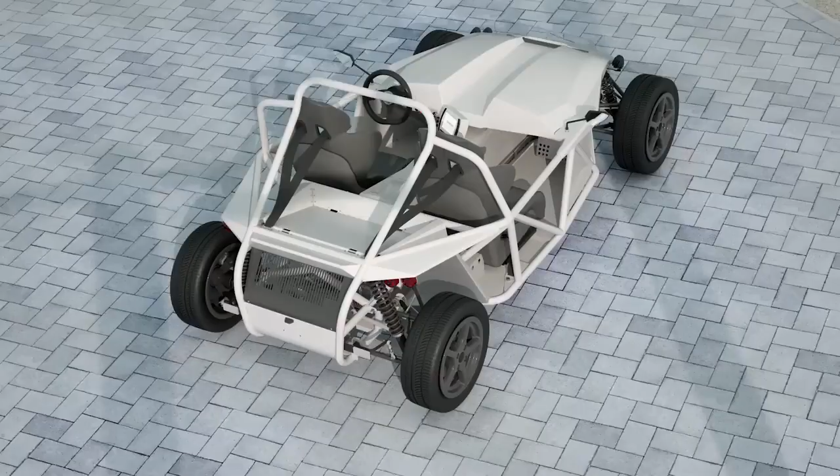Hello and welcome. I'm Ben Widdowson, Marketing Manager at Siemens, and this is the summer 2022 release of Siemens NX. We've got some incredible things to share with you today, so let's get into it.

Today, almost every product being created needs to seamlessly blend electronic and mechanical components. From smartphones to smart buildings, ships to heavy equipment, and medical devices to electric vehicles. Every industry is experiencing this explosion of electromechanical complexity, and this creates a huge challenge for the companies and teams bringing these products to market.

Here at Siemens, we understand this challenge. We also recognize the huge importance of tight integration across the fields of electronic design, mechanical design, and manufacture. And today, with Xcelerator, this integration goes deeper than ever. Bringing these disciplines together on a single platform enables you to build the most comprehensive digital twin, maintain a digital thread throughout the entire life cycle, and collaborate across your supply chain.

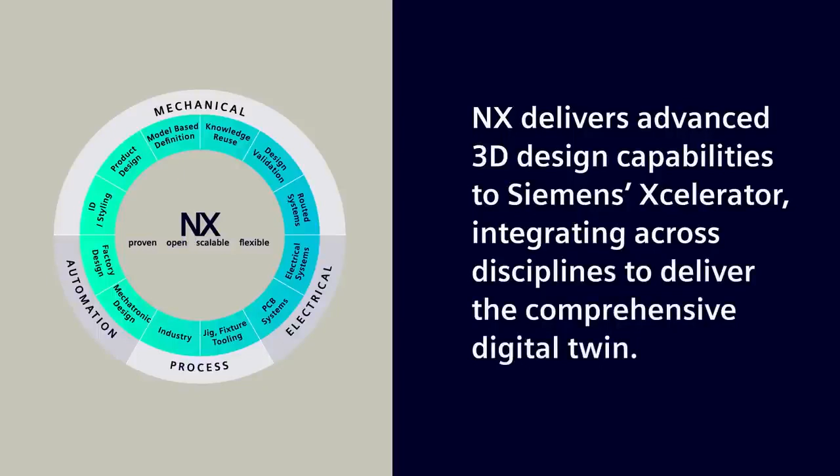NX is the industry-leading electromechanical design solution, offering you the most comprehensive design workflows in the most productive modeling environment. Such deep integration and focus on collaboration make this the best release of NX ever. Earlier this year, industry market analyst Lifecycle Insights commented that Siemens NX provides best-in-class electromechanical design tools, smoothly weaving together the different needs of each discipline, all in a tightly integrated, collaborative environment.

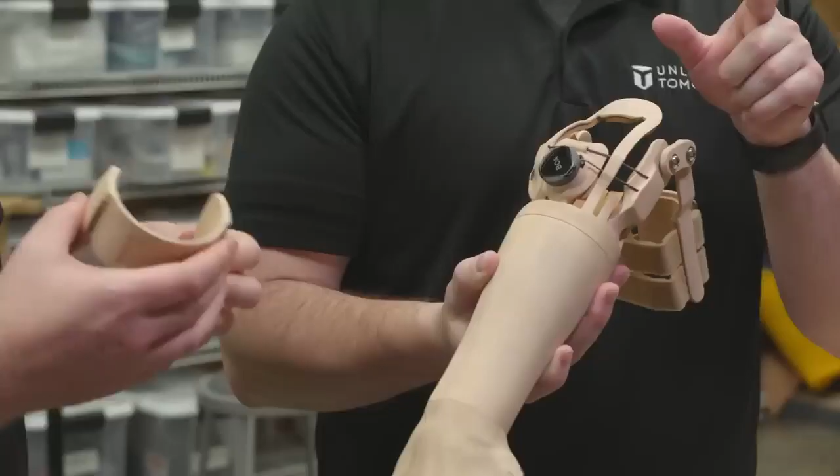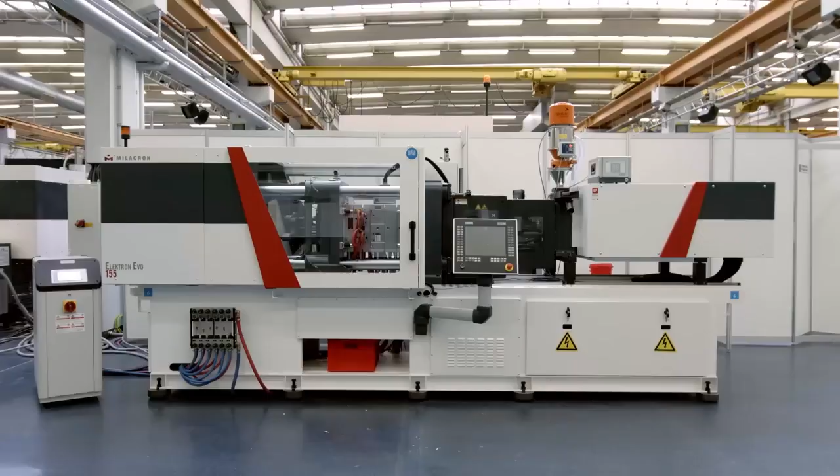Our customers across all industries love using NX, like Unlimited Tomorrow, who are on a mission to make custom prosthetic limbs cheaper and easier to access for the millions of amputees worldwide. And iMFLUX, who are under enormous pressure to create mold designs as fast as possible, whilst also making them right first time. And finally, NASA, who seamlessly integrated design, analysis, and simulation, enabling them to meet the thermal challenges posed by the Mars Curiosity rover.

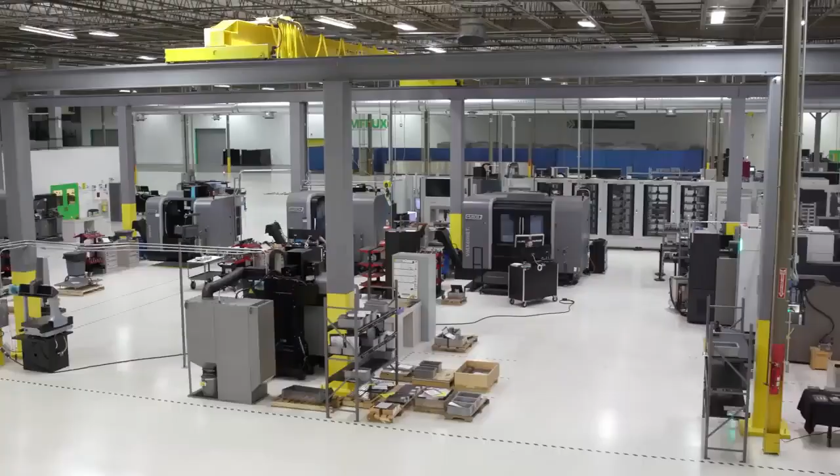Our customers tell us that productivity is a key driver. Electromechanical design teams are under pressure to boost productivity by their executives, whilst also keeping pace with the design and production of increasingly complex, smart and connected products. A staggering 94% of executives are seeking some or a good amount of productivity improvement from their engineering teams.

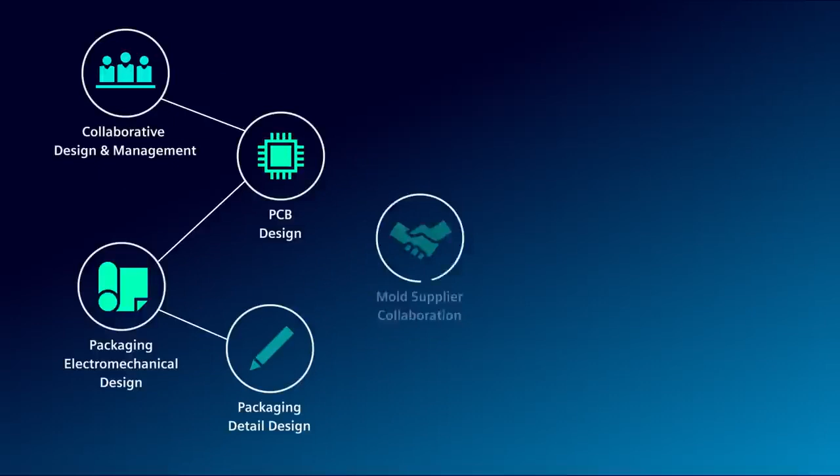Our customers also tell us that security of their data, people and IP is a top priority, and at Siemens we take security very seriously. Being on the latest release of NX ensures that you're benefiting from the latest security enhancements. NX helps you collaborate more easily, increase productivity, and embrace electromechanical complexity, all in a secure environment. Today, we're going to share an end-to-end workflow covering electromechanical design, mold design and analysis through to manufacture. Let's head into the office and jump into the demo.

So, as we head through to join the design team, the design manager has tasked the team with increasing the processing power of the onboard infotainment system. The electronics team will be working to add additional chips and a new heat sink to handle the increased processing power, and the mechanical team will have to redesign the housing to encompass those new electronics. So, let's hand over to Dave for the first part of the demo.

So we're looking at the Active Workspace environment embedded in the NX session, and I have a new notification in my inbox. I see I have a new change request that I need to act upon. Let's open that up and we see that it's regarding the infotainment upgrade. Looking at a bit more detail tells me the infotainment system needs to be enhanced to provide the latest capability in entertainment, navigation and device connectivity.

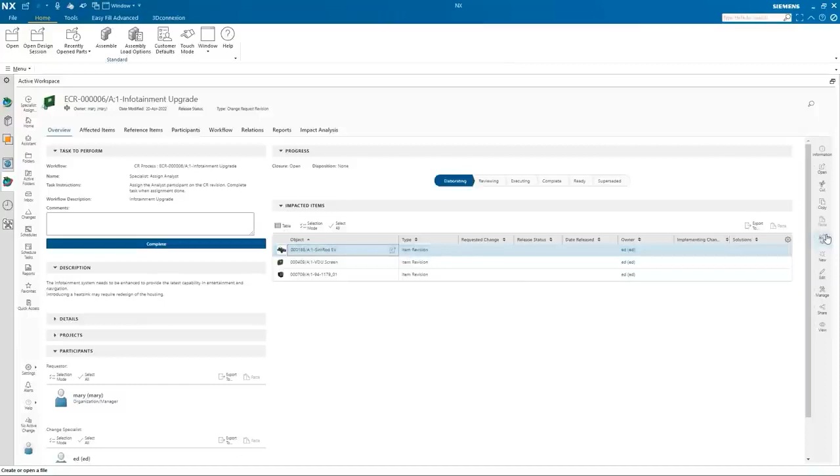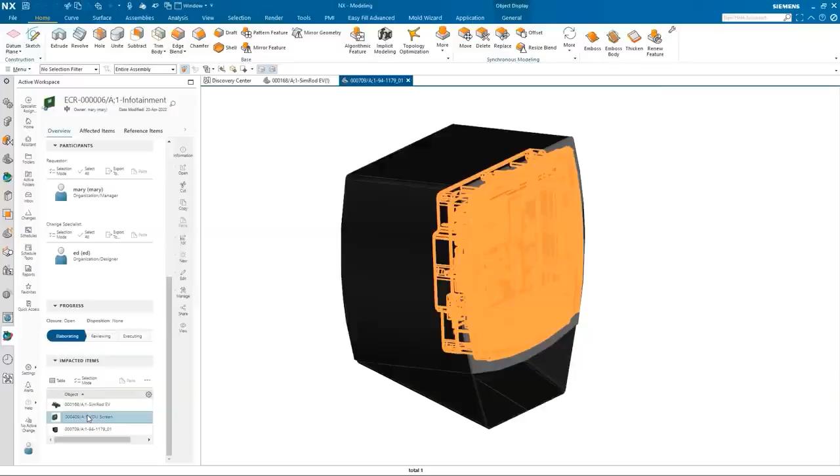Memory traces will need to be improved and increased processing power will be required. And that will require a heatsink to be added, and that in turn may require changes to the housing to accommodate it. The items affected are listed and can be opened directly into NX. As we explore the impacted items, selection in Active Workspace highlights them in NX for easy identification as we get familiar with the change. We'll open the main assembly that shows the current infotainment housing, and finally we'll open the detailed assembly and reveal the PCB that will be modified.

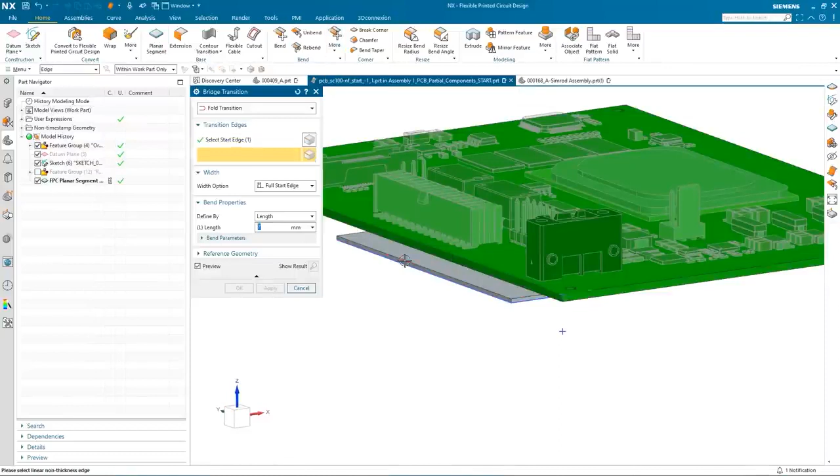Now we have a clear understanding of the parts that will be changed to support this upgrade and can progress with the change request. The first change is to convert the PCB from rigid to rigid flex. We edit the layer scheme to be a rigid flex construction and create the features for the second rigid segment and create the flex segment, both at the appropriate board thickness. Finally, adding stress relief where the flex enters the rigid segment, then developing the board to the flat state.

Once the board changes are complete, we move the connector to its new position and are ready to publish the changes for the board and the connector to the electronics domain. The published data shows the board geometry and thickness change. Now in Xpedition, the electronics designer receives the change and reads in the collaboration data of the board and the connector modifications. Both domains are now synchronized.

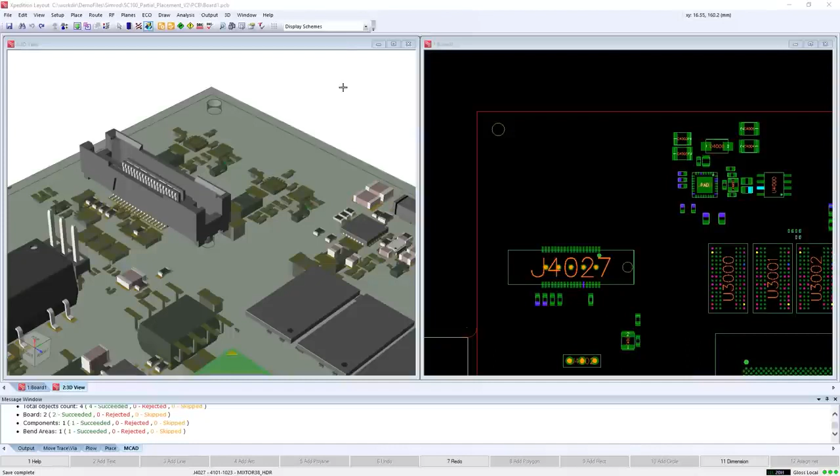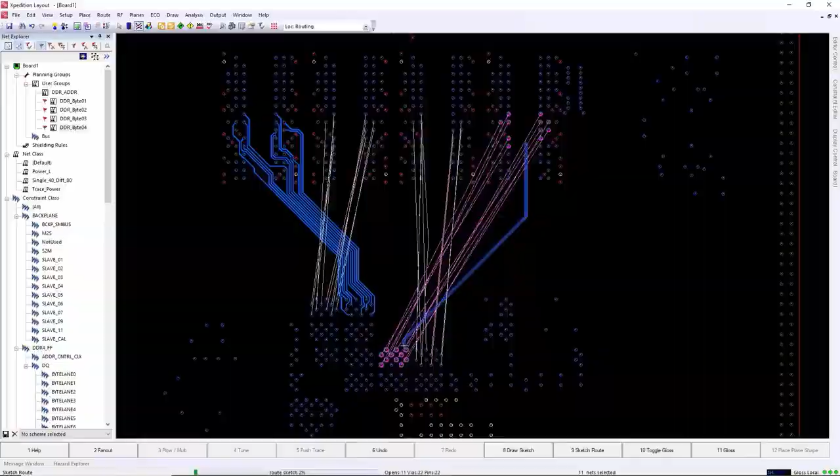The new functionality is now added to the board and the change is prepared for sharing with the mechanical team as a proposal of change. During the time I review the new component placement in NX, trace routing can be continued in different partitions of the design. As requested in the change note, the DDR memory chips are rerouted. They allow very high transfer rates, which requires extremely accurate timing between the different electrical and clock signals. So here they define a sketch path to automatically route a group of net lines to follow the same pattern while meeting the signal integrity constraints.

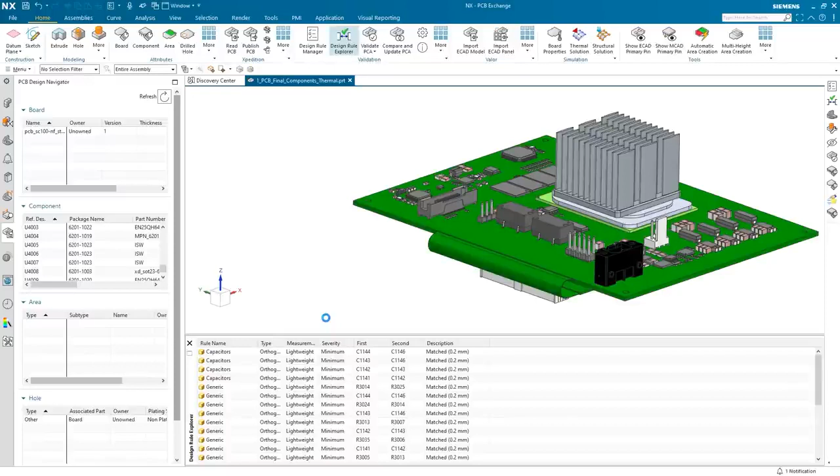The design change has now been reviewed and the final board has been completed by adding the heatsink and the flex, folded, ready for integrating the design into the overall assembly. The final design is then validated using a common rule set shared between both tools, giving the confidence that the mechanical and the electronic domains are in sync and saved to Teamcenter. The design is valid, and in the next step, we'll head over to the mechanical design team.

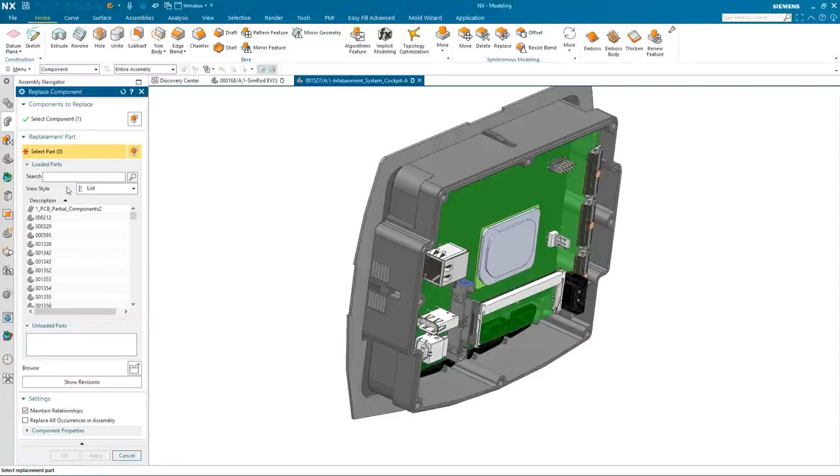So Dave's given me the updated PCB for the infotainment system. So we're going to take a look at it and see if there are any issues. I've got the assembly opened in NX, and I'm just going to isolate the infotainment system. Just going to remove some of the outer casing and we'll remove the back cover. And you can see the original board in the back of the infotainment system. So I'm going to replace that with Dave's new PCB. You can see that. And we'll include it now in the assembly. And then we can take a look and see if there's any issues.

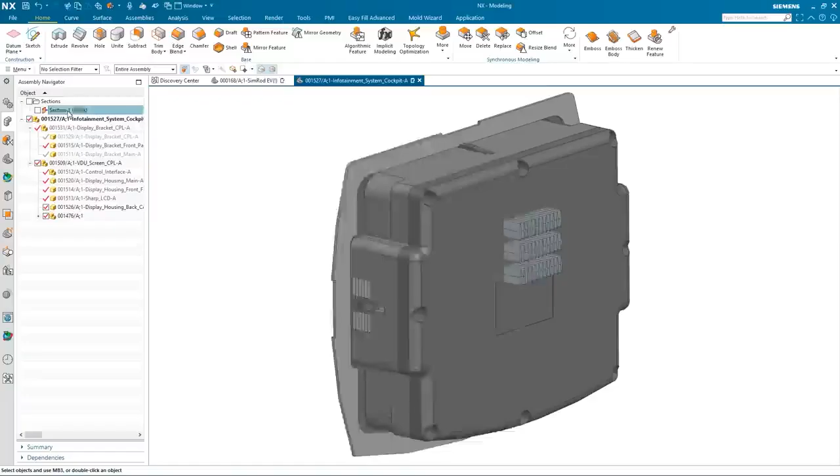So you can see there's the new assembly. It's got the heatsink in it. And when I bring back the back cover, you can see it's actually protruding. If we take a slightly better look at that by clipping it, you can see through the section of the model where the issue is. So I'm going to need to make a modification to the back cover. And it'll also give me the ability to add a little bit more of an organic shape to this, a little bit more aesthetically pleasing. So let's take a look how we do that.

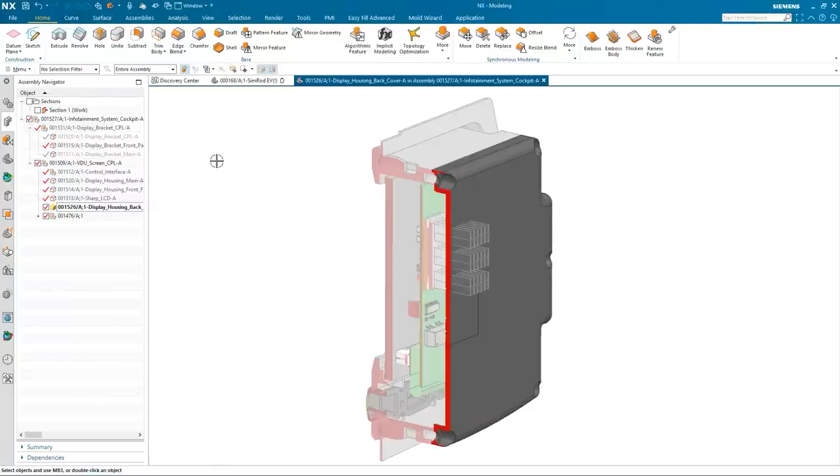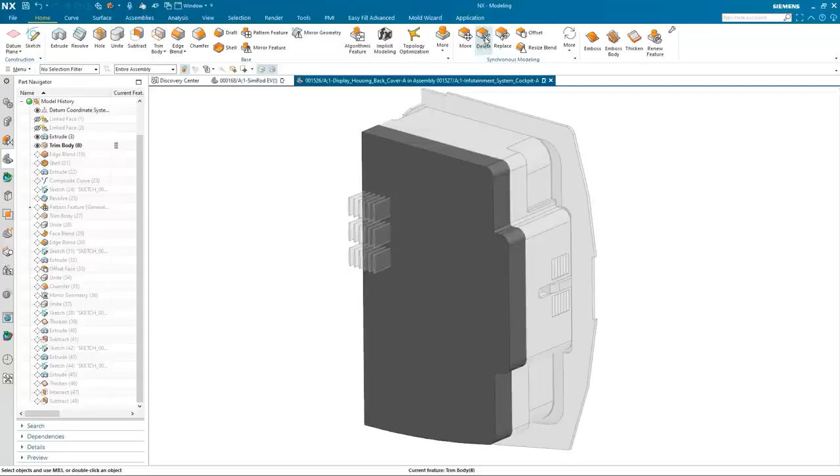We'll make the back cover our working part, and you can see we've got a fully featured model. And I'm going to roll back the feature tree to a position where I can make my changes and then roll the model forward to incorporate those changes. So I'll roll it back and we can start to construct a shape which is going to alleviate the issue that we've got with the heatsink protruding. So I'm just going to use some synchronous modeling first of all to remove some of the blends. As you can see here, very easy to do that.

And let's just extrude this back face. And I want to obviously go past the heatsink, but what I'm going to do is ask it to be offset from the back of the heatsink by 4 millimeters. So as you can see, I've got some decent clearance now. Once I've got that, let's add a little bit more shape to it.

So we're going to add some draft. So again, we can pick up on add some draft, pick up on that face as the direction, and we need a stationary face, which should be the back face of this part. And then we can select the faces that we want to draft. And we'll add some draft to 2 of the other faces. We'll change the value this time, which will be this one here, that face, that one there, that one there. Okay, so I've got the base shape.

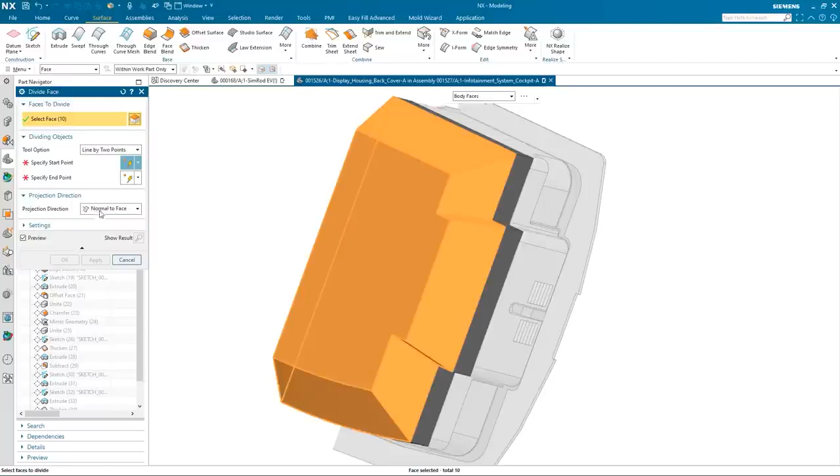So I'm just going to divide this back face here between that point and that point. And again, using synchronous technology, we're just going to move this face down a little bit. That's fine. So let's just unite that face with that new model. Okay, and we're going to add some shape. And to do this, we're going to use X-Form.

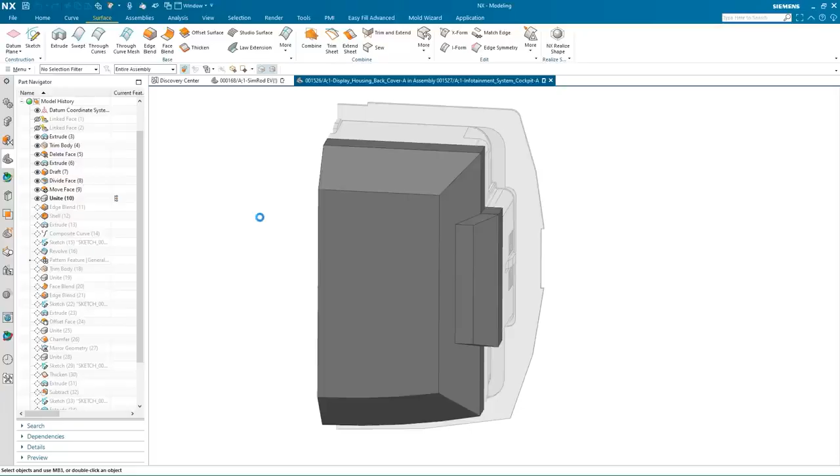X-Form gives me the ability to select a face, give me options to make it easier for me to add some form. So in this case here, I'm just going to drag that face out using the control polygon. We'll apply that there. We can pick up another couple of faces. This one at the top. Again, we can add some form to that. And I can continue to do that with some of the other faces on the model to get the shape I need.

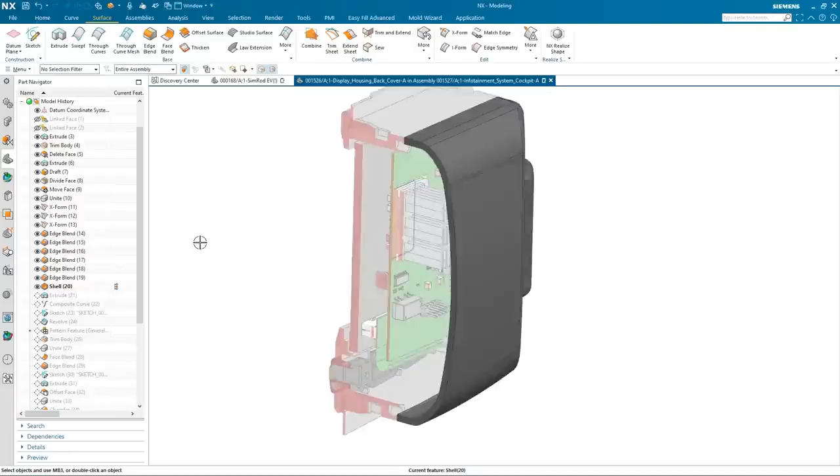So as you can see, we've added a few more features to our model, a few more blends. I've just got one more blend to add, and it's going to be on this set of edges here. So again, we'll just drag it to size, and we'll okay that. So there we have the one half of our model, and you can see now that we've removed the collision between the heatsink and the back cover. We've given it a little bit more form, make it more aesthetically pleasing.

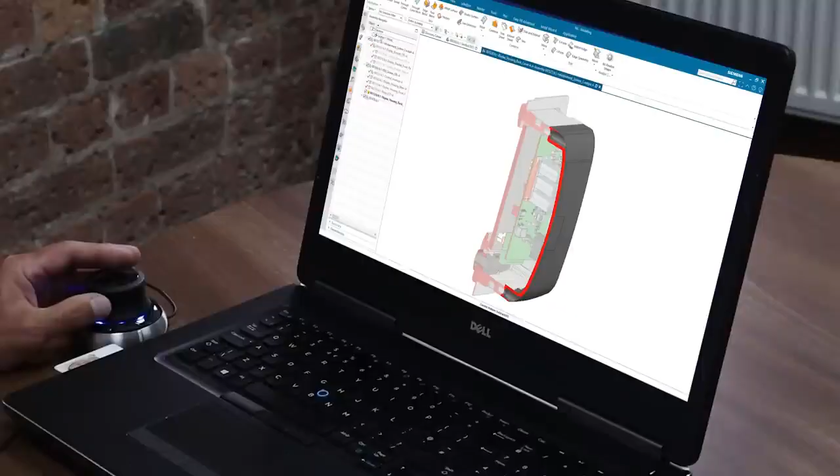All I need to do now is to roll the model forward to the end of the feature tree, and all of the features will replay, taking into consideration the additional features I added to the model. And there you can see it's completed. What we can do now is unclip, and there is our completed modified back cover. I'm going to head over to see Sam to see how we can collaborate on the detail design.

I finished that design modification on the rear cover, and I thought we'd take a look at it and see what else needs to be done. Excellent. So let's get started working on this so we can get this project done.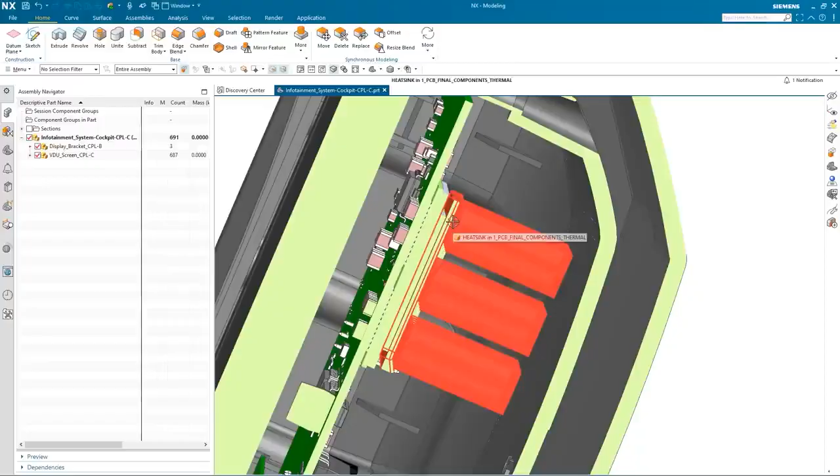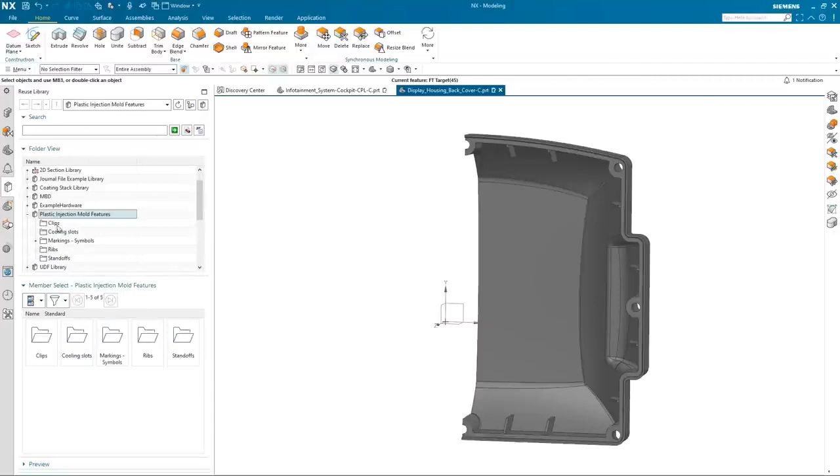As we collaborate and review the electromechanical design of the infotainment system, we have been notified that the PCB design has been upgraded to accommodate a larger heatsink. This design change will require us to make additional venting slots to the back cover to meet this heat transfer requirement. As we had a chance to review this design's history of the back cover of the display housing, we see that if we insert the venting slot at the earlier part of the design intelligence, we can minimize the workload and maximize the efficiency.

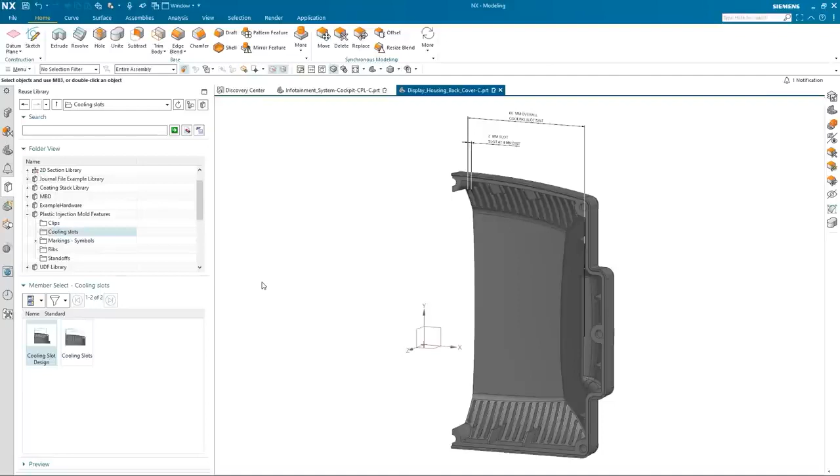We'll now insert a couple of these feature templates for the venting slots to our rear housing cover. These templates require some input parameters, then it will automatically embed intelligent venting slots along with the proper PMI entities onto the cover. Reuse features and feature templates are all part of NX standard functionalities that can provide companies' IP into their design process. Many of these plastic injection features are a part of the standard design.

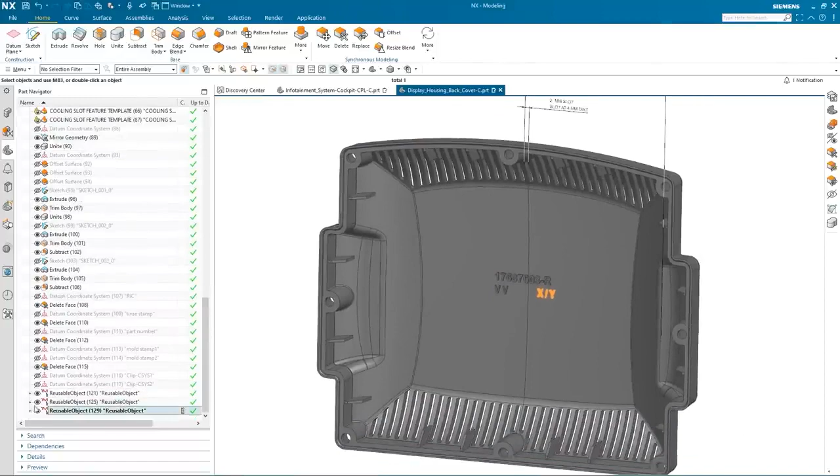We have enabled and reused these intelligent features that can quickly complete the task at hand and then focus on other time-sensitive items. Once these feature templates are added to the housing cover, users can see how NX is maintaining that intelligent design within its history. From the feature history, I have already created several standard plastic injection mold features. I will quickly show you how they can be quickly added to the current design.

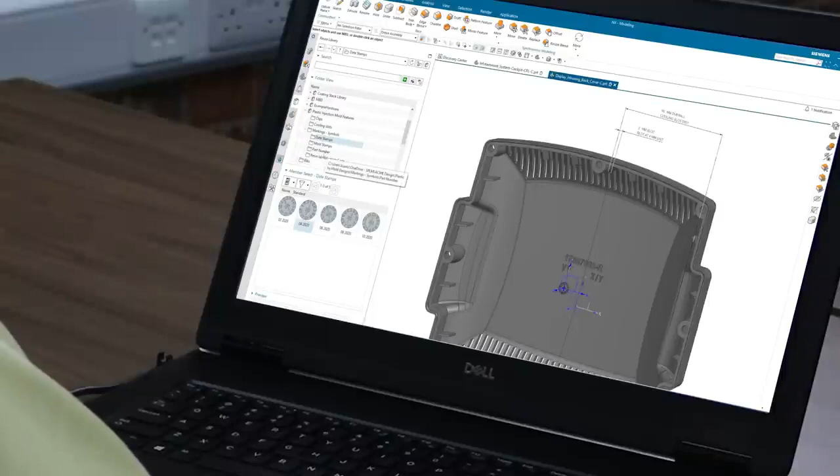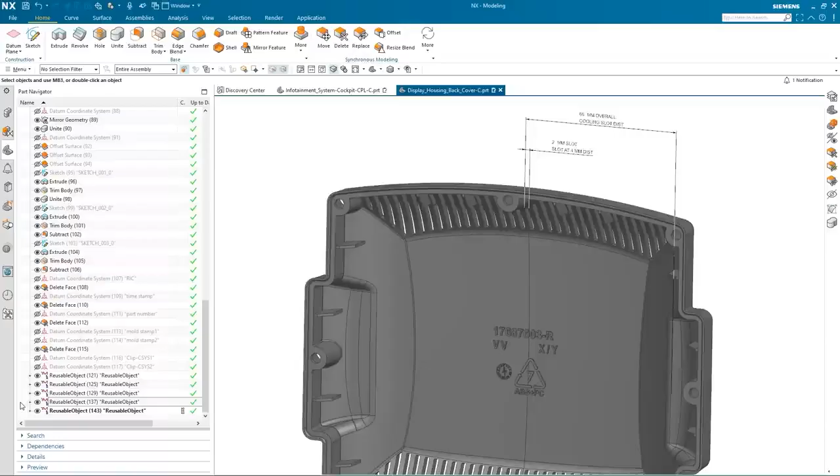Adding timestamp and RIC is as simple as drag and drop these intelligent features from the reuse library onto the target placement CSys. As you can see, the usage of the reuse library, in comparison to the designer that had to create these features manually, demonstrates the power of NX in a design process. To increase the productivity of the plastic injection manufacturing design, reuse of these standard features will support that requirement. Now we have completed these design tasks. We see that NX is tracking these design intelligent features for any future design change.

We'll now take a quick look at the infotainment system. By removing the rear cover, we see that quickly we were able to add these cooling slots to support design change and collaborate with others in the engineering process by using Siemens NX. I have now completed the design change. We'll hand it back to Paul.

Thanks, Sam. I can see I have a notification showing that changes have been made to the assembly. I can now reintegrate Sam's changes back into the master model. Well, you can see that the new electronics are now housed correctly in the enclosure. So we're ready to hand over to Matt, who's going to run a thermal validation before we get the part manufactured.

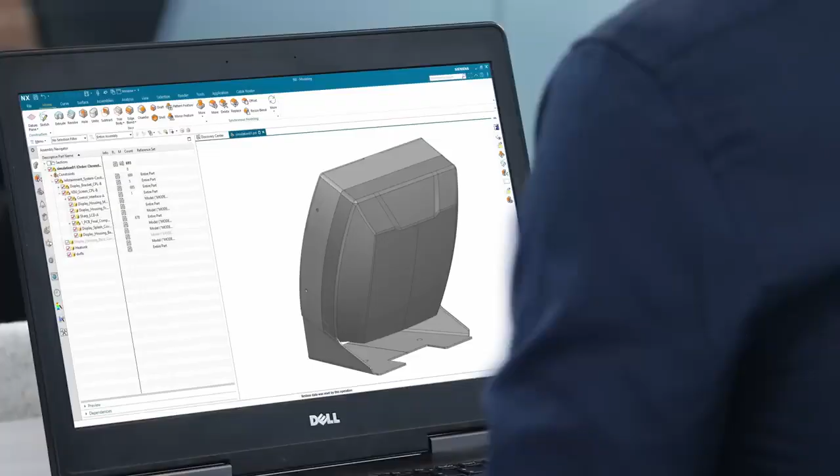Thanks, Paul. We're going to use Simcenter FloEFD for NX to perform 2 thermal simulations to see how the 2 rear cover designs, with and without cooling holes, impact the temperature of the electronics inside. We're now in FloEFD. Using a template, we've created a project to simulate the back cover without holes first. All the correct material properties have already been assigned. The materials specified in the NX model can be used, or new ones specified as desired.

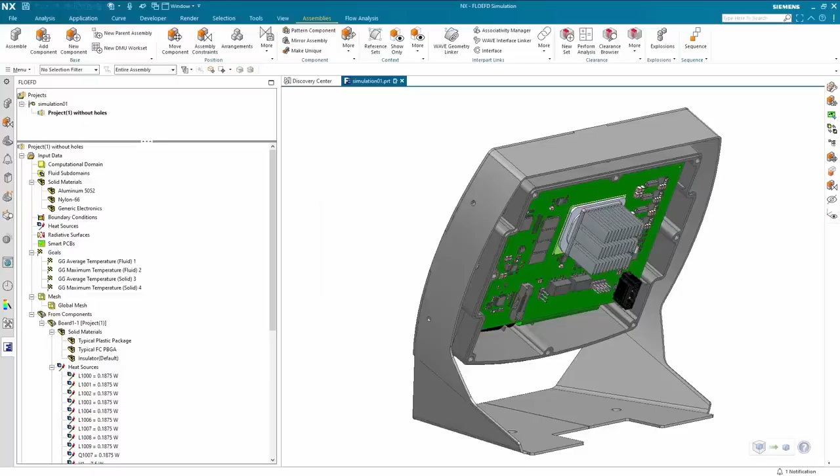The mechanical representation of the PCB and components is replaced with a thermal representation that includes all the necessary material and thermal attributes for fast and accurate simulation. In this example, FloEFD's Smart PCB technology is used to enable the detailed copper distribution in the PCB to be modelled without significant computational overhead. A detailed component model of the microprocessor is also used. This level of detail in the PCB and component models is key to obtaining accurate predictions of component temperatures.

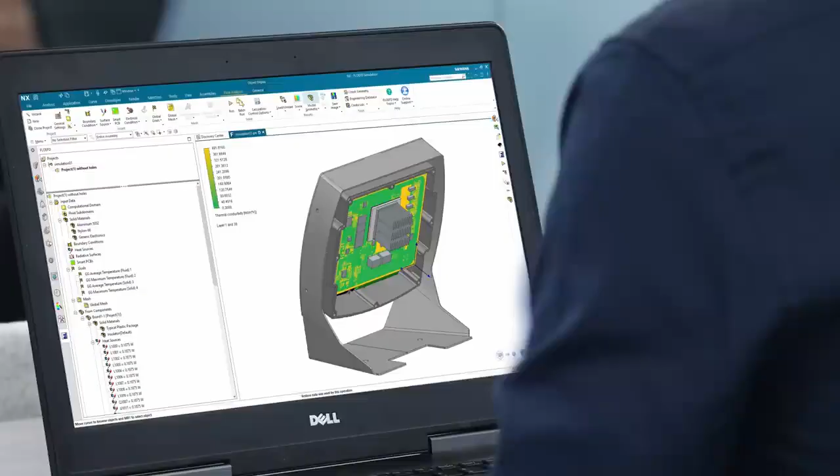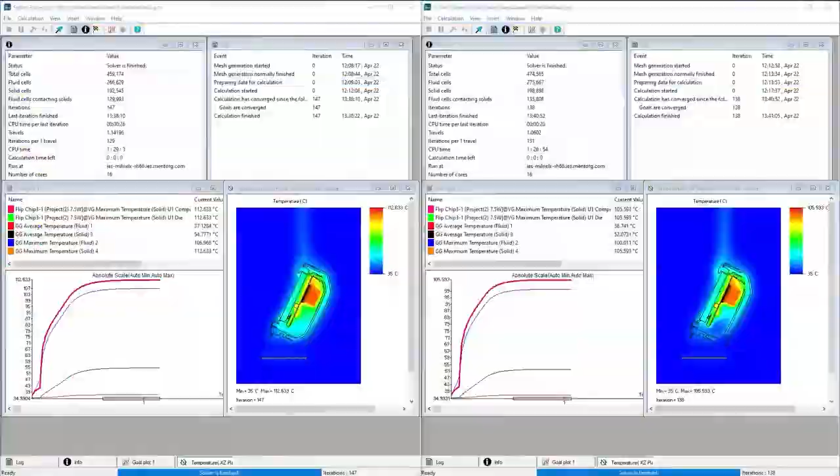Before we run the first simulation, let's clone the project to create a second simulation featuring the modified cover with additional cooling holes. Now we can solve both projects. Both simulations have finished and we're ready to review the results. Straight away, we can see just from the summary results shown in the 2 solver windows that the addition of cooling holes to the rear cover has had a significant impact on the junction temperature of the microprocessor.

Inspecting the detailed results of the second simulation with cooling holes, we can again see the junction temperature of the microprocessor is about 105 degrees C. We could review the results of the first simulation without cooling holes in exactly the same way, or use FloEFD's built-in compare tool to compare both result sets side by side. From this, we can see that the addition of cooling holes has reduced the junction temperature of the microprocessor by about 7 degrees C. A temperature reduction such as this could prove significant in ensuring the long-term reliability of the product.

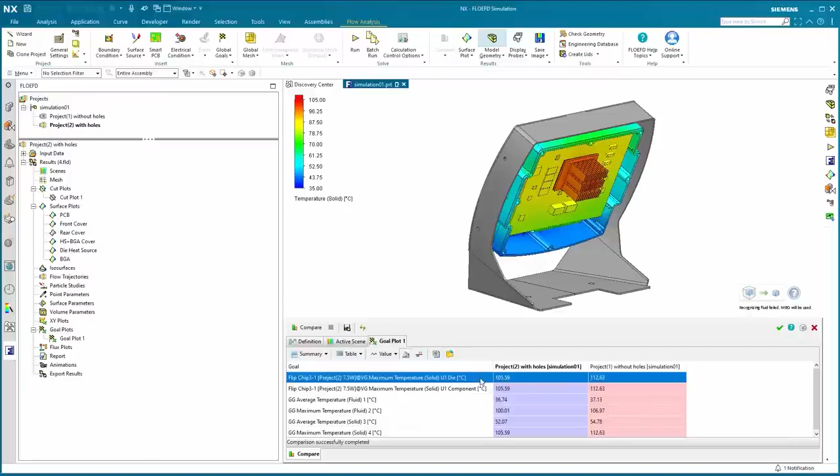Now the thermal simulations have been completed, I'm going to hand over to Boris, who will collaborate with our supplier on manufacturing. Thanks, Matt. Now that the plastic housing has been revised and completed by the mechanical engineer, I can use NX Mold Connect. NX Mold Connect is a new Siemens cloud-native SaaS solution that connects OEMs with their trusted suppliers to efficiently manage collaboration. It's used to ensure that parts are fit for manufacture, to speed up the design cycle by eliminating rework and extra cost. With instant-on access, there is no deployment or configuration necessary, so getting started is quick and easy.

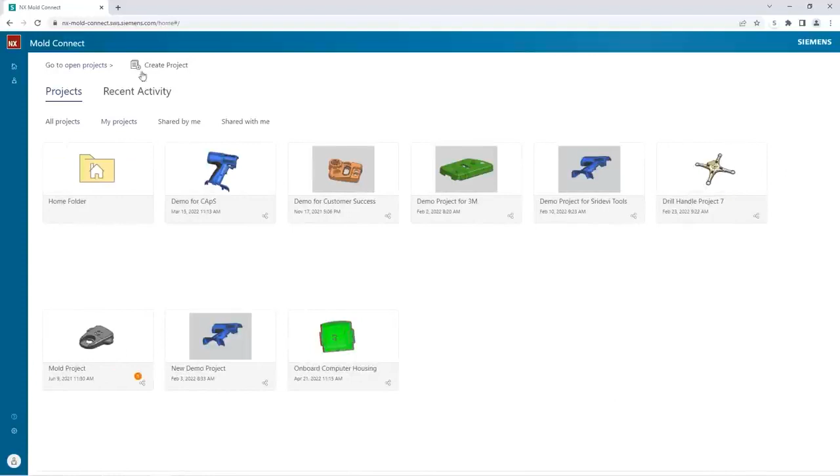After logging into NX Mold Connect using my internet browser, I can start by creating a project for the infotainment system and set the project number and due date. Then I can upload the display housing plastic part along with the part spec. After the upload is completed, I can create a quote request. I'll see that the status displays that this is a new request, which I can add files to. After the request is created, I can add files to it from the project.

Next, I add my trusted suppliers to the list of suppliers in the RFQ. I can choose from several file access permission levels and send the request. I can see that the status of the quotation is updated to out for quote, and it also shows that the quote has been sent to both suppliers. At this point, I'll wait to hear back from the suppliers.

Thanks, Boris. So I've just received an email letting me know that I have a request for quotation from my customer. Let's check it out in NX Mold Connect. Using Mold Connect makes it easier for me to collaborate with my customers on mold quotations. I'll start by creating a quotation based on the part and spec provided by the customer. The status has now changed to acknowledged, so they'll know that the RFQ is in review.

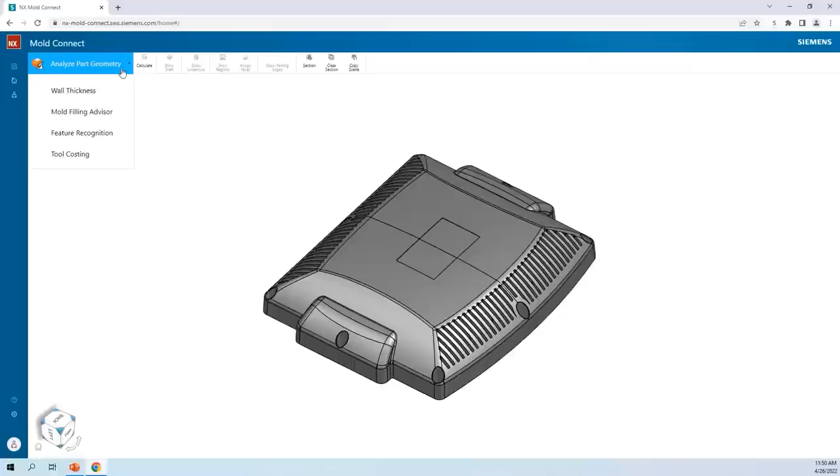The first thing I'll do is open the part to run design for manufacturing analysis. I can see that I have a choice to perform a few different types of analysis: geometry, wall thickness, and mold fill. In this case, I'll start by selecting the body, the draw direction, and setting the draft angle limit. Once the calculation is completed, I can see several different types of results.

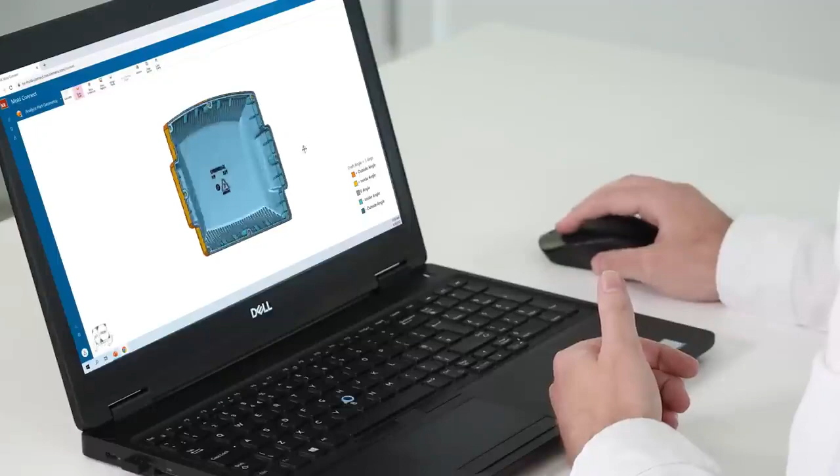The draft analysis shows the regions with different ranges of draft angles. I can show and hide the regions to inspect the model and find problem areas. After hiding the drafted regions, I can see that the sides of some of the holes have not been drafted, so I'll capture the feedback and send it back to the customer. From the analysis, I can see that the model doesn't contain any undercuts that require additional sliders, keeping the cost of the tool down. Cavity and core regions are well defined, so I'm going to send the report to the customer showing that the parting line, wall thickness, and mold fill results are acceptable for manufacturing.

We're back, and the customer has now corrected the draft issues, so I'm now ready to generate a cost estimate by using results from automatic feature recognition. This makes creating a quote quick and easy, and I can share it directly with the customer in NX Mold Connect. So let's go ahead and send it.

We've received the accepted quote back from the customer, and we've been awarded the job. So let's go ahead and jump into NX to design the mold base. To design the mold base, we're going to use NX Mold Wizard. NX Mold Wizard embeds tooling expertise into NX, enabling you to create molds based on the product model with full associativity between the two. NX Mold Wizard helps you decide the mold direction automatically based on the part geometry.

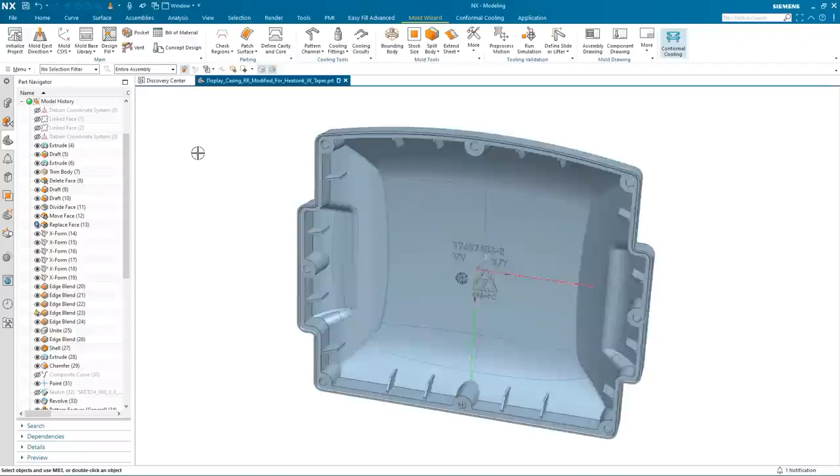We're going to use an existing preconfigured project, then select the materials of the part to initialize the mold design activities. As you can see, workpiece has been added automatically. This layout will be multi-cavity. In this case, we'll choose the rectangular option, followed by the number of cavities and the distance between them.

Embedded mold filling simulation inside NX can simulate the entire filling process of injection molding. It's an important step to understand where problems may occur in the cavity filling phase, so we can further optimize the design. We're going to take the cavity layout previously created and analyze it. Using the layout, we can define the process conditions for validation, and NX Easy Fill Analysis provides 6,000 plus commercial materials out of the box. We'll select the material, producer, and grade for the part.

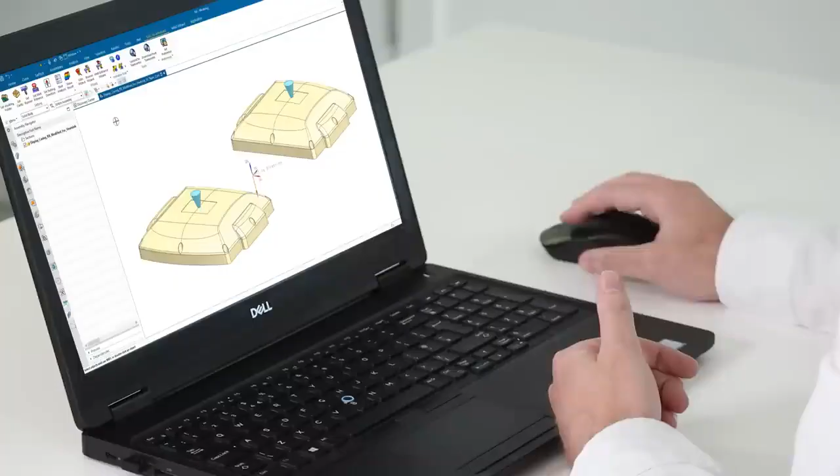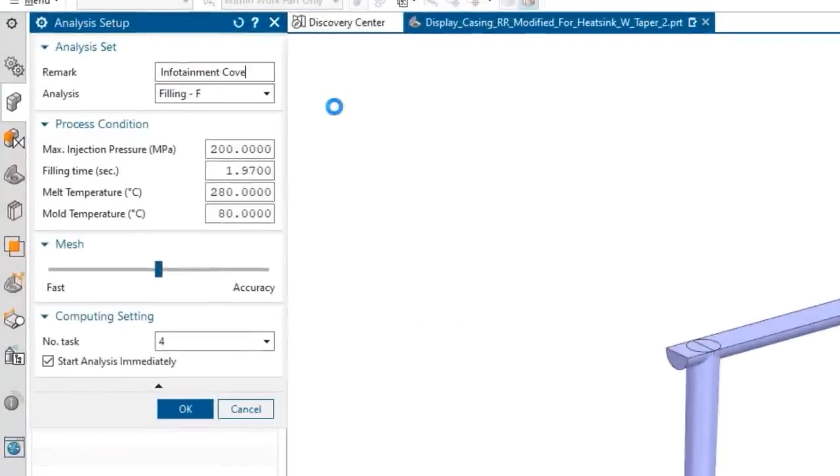Next, we'll define realistic runner and gates for the mold design and define the mold direction. We can then go ahead and set up the processing conditions. NX provides capabilities to simulate the filling and packing or entire filling, including packing, cooling, and warpage. For this mold, we'll go with a full analysis. Next, we want to set the process condition such as injection pressure and filling time, and then let it run for solving. Once it is solved, we can visualize the results.

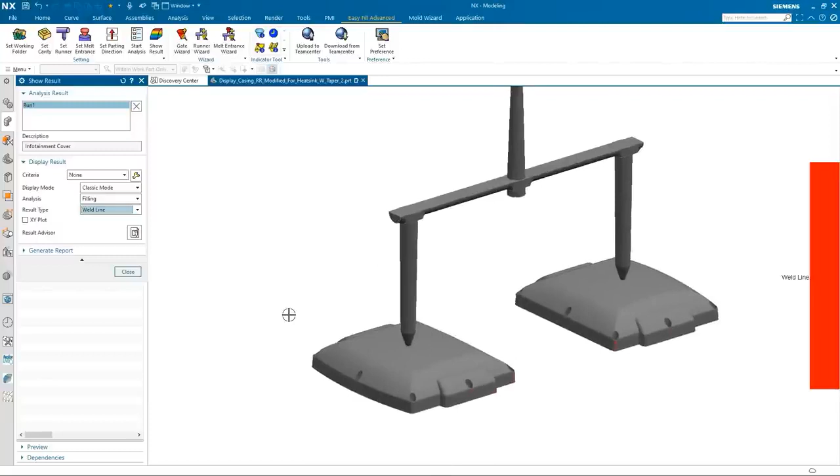We'll start with melt front time to see how long it takes to fill the cavity, then move on to weld lines, air trap, gate distribution, pressure, and finally, we'll take a look at warpage and packing. Once we understand what's going on with the injection process, we can automatically prepare a report to provide feedback to either designers or customers to see if there are any adjustments that need to be made either on the part, mold design, or injection process.

In this next stage, we'll identify the core and cavity regions, creating parting surfaces and extract the core cavity. With the use of the check regions function, we're able to easily identify core and cavity regions and assign colors to these, which will later be used for creating parting lines and extracting regions.

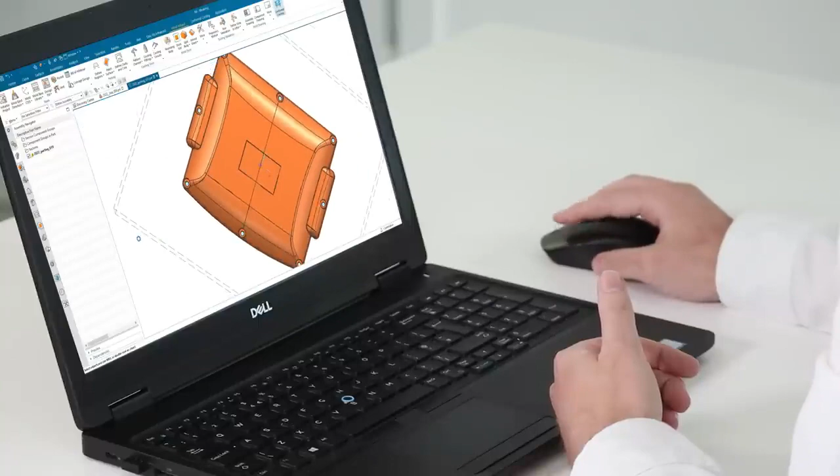NX Mold Wizard has advanced automated tools for creating optimal parting lines based on the draw directions and different regions defined. NX identifies the openings on a design part and automatically creates shut-off surfaces needed prior to extracting the core and cavity. NX Mold Wizard guides you through the creation of parting surfaces with recommended surface types based on the geometry conditions. With the parting surfaces defined, a single click is all that's needed to automatically execute the core cavity extractions.

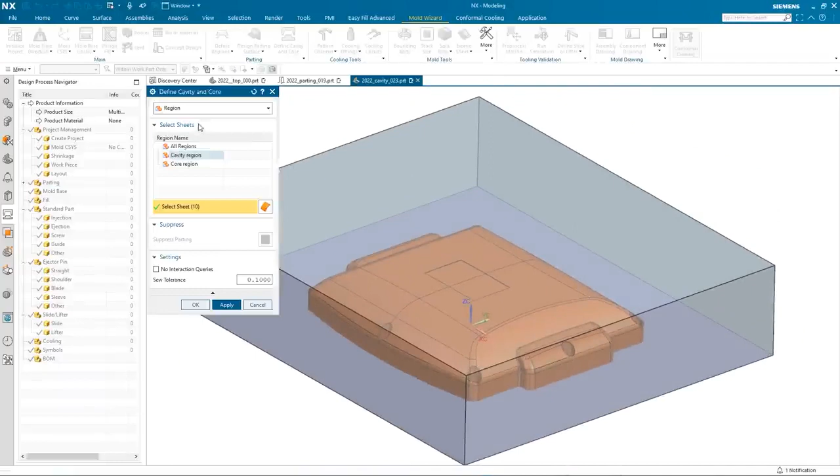Finally, these files are added to the top level project. This shows the power of NX Mold Wizard, improving your productivity by automatically managing the appropriate project structure. Now we're in the position to create the 3D mold base using a library built on industry standards such as Hasco and DME. NX Mold Wizard provides a large number of standard mold parts out of the box covering many common vendor components. You can also configure your own standard parts.

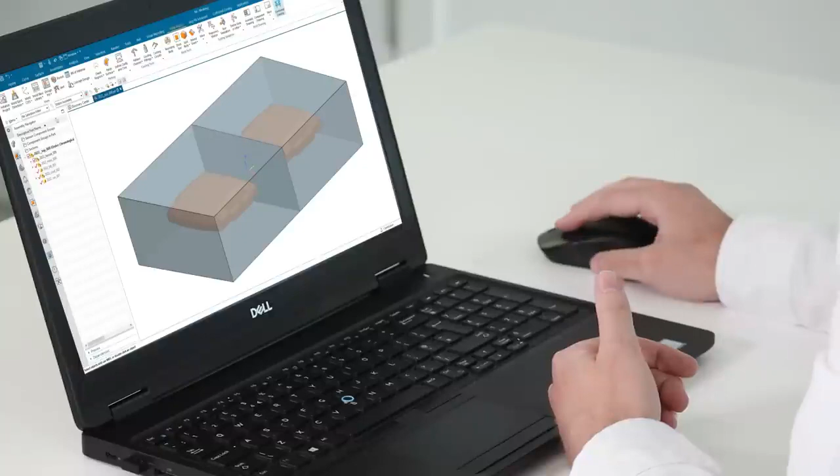Go ahead and choose a mold base from the reuse library. You can select the desired index and adjust the parameters to create the 3D mold assembly. NX provides a visual preview of the mold base too. Once the mold base is created, it's added to the mold structure automatically and you can see the moving and fixed half in the assembly navigator.

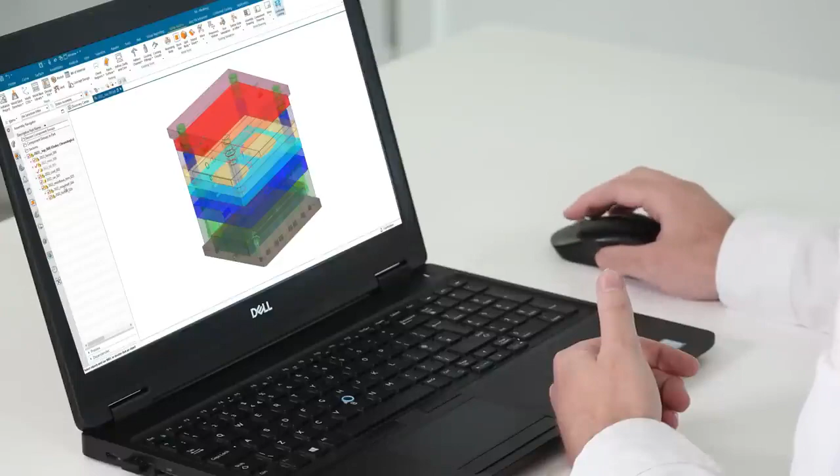Improving the cycle time and quality is important, so we're going to add conformal cooling channels to both the core and cavity inserts to achieve this. Mold inserts with conformal cooling channels can be easily created using additive manufacturing processes, which we will see later on. NX has various ways to create a conformal cooling channel, but in this instance, we'll use the projection method. There is a sketch profile that will be projected onto the product surfaces in the mold cavity.

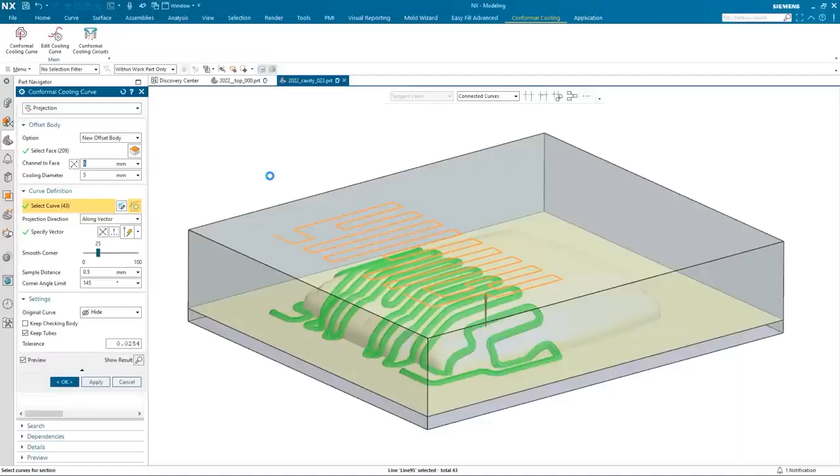The first task is to define the minimum distance that needs to be maintained between the product surfaces and cooling channel center. We can then choose the cooling diameter to achieve the proper flow of cooling water, and finally select the sketch mentioned earlier. And there you can see the cooling channels with the desired conditions have been created. All that's needed now is to complete the design by creating inlet and outlet of the cooling channels, then the injection systems based on the mold filling simulation we performed earlier.

Now that the mold design is complete, I'm going to hand over to Joe on our manufacturing team, who'll be 3D printing and finishing the mold. So we received the design part now from Jamie and we're ready to take it into the NX additive manufacturing environment to prepare it for printing on the Renishaw printer.

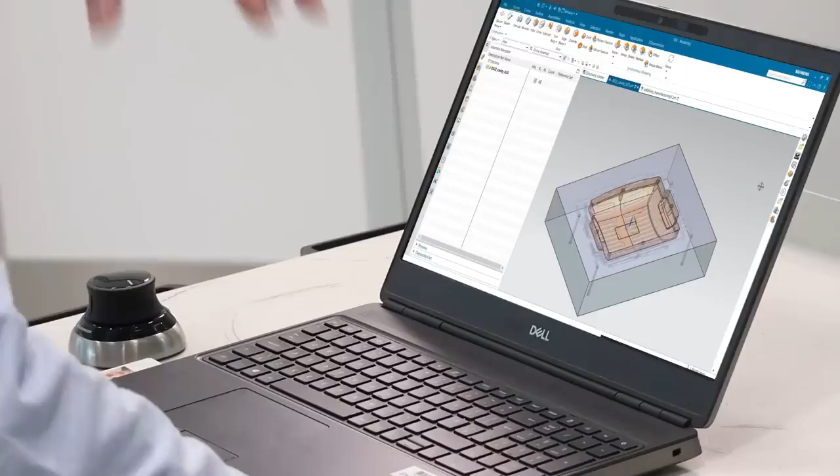So we can see from the geometry that's been designed by Jamie that this is perfectly suited for additive manufacturing. We've got lots of internal cooling channels which wouldn't be able to be produced in any other way than additive manufacturing. So let's take the part into the NX AM environment. So we create a new NX session. The first thing we're going to get asked is what printer do we want it to go onto.

So I've got a representation of the Renishaw print tray already configured in the AM environment. And that gives us an exact representation of what's in the Renishaw printer behind me. We can now move on to positioning the part. So it's really important that the part is positioned in such a way that it reduces the amount of support materials because that's time consuming to remove. Also make sure we have the highest quality component that can be printed.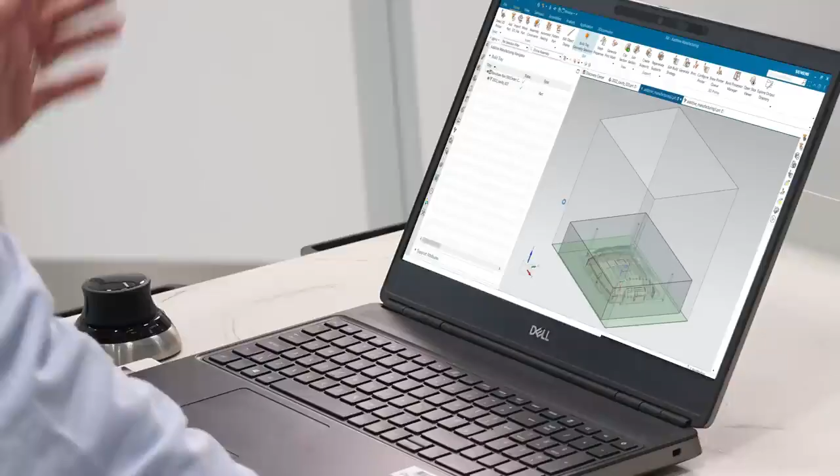So if the part was a little more complex or not as prismatic, we could run some orientation optimization, which will give us that best orientation. But in this case, it's pretty simple. We're just going to flip the part 180 degrees round. And then what we're going to do is move it 5mm off the printer bed so that it can be removed easily. So the next stage will be to apply some support materials.

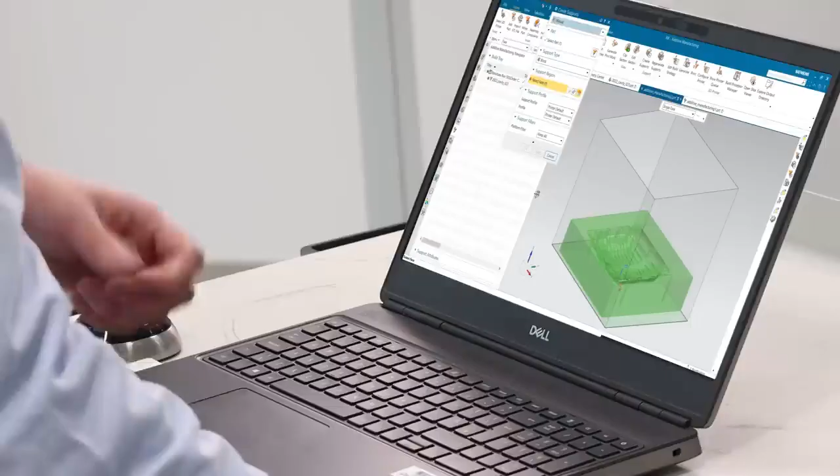There's two ways we can do this. We can either use the automatic support creation, where NX will look at all the geometry and analyze any areas that will require supports and it will apply them. The second way to create supports is to simply select the part and then select the faces you want to create supports on. So I'm going to select the part, select the lower face.

You'll notice there was an area called support profiles. Support profiles is where we can store and retain different types of supports, different parameters for those supports that can be used or specifically dialed in for particular materials, for particular printers and for particular geometries. And that really makes it easy for a business to standardize on what support profiles work best for their components. As we can see here, we've got the generated block supports and everything looks really nice.

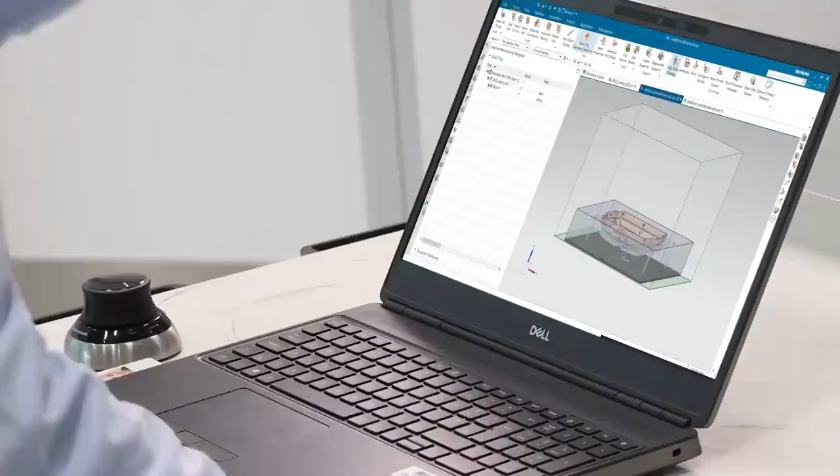And the next step we need to do is prepare that particular part for the printer. And to do that, we need to assign a build strategy. So in the build strategy, we've got some parameters such as the layer thickness, and the laser patterns that are going to be required. And again, that can be material specific or it can be printer specific. But regardless, we can set them directly in NX and we can simply hit the generate button and start the slicing. What happens then is NX will break that geometry down into all those slices so that there is an output file ready to go directly into the Renishaw printer behind us.

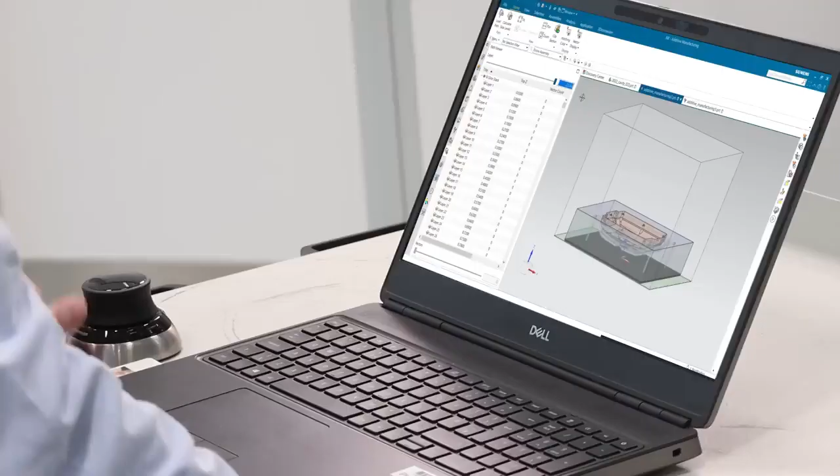Just before we do send that part out, we can take a quick preview of what that looks like in the path viewer. And by dragging this handle across, you can see all those different layers that have been sliced, all those internal cooling channels, how it's going to be printed out, all the way down to the support materials at the bottom. Okay, and that's about it. We're ready to take the output file from NX directly into the Renishaw printer behind us and start that print.

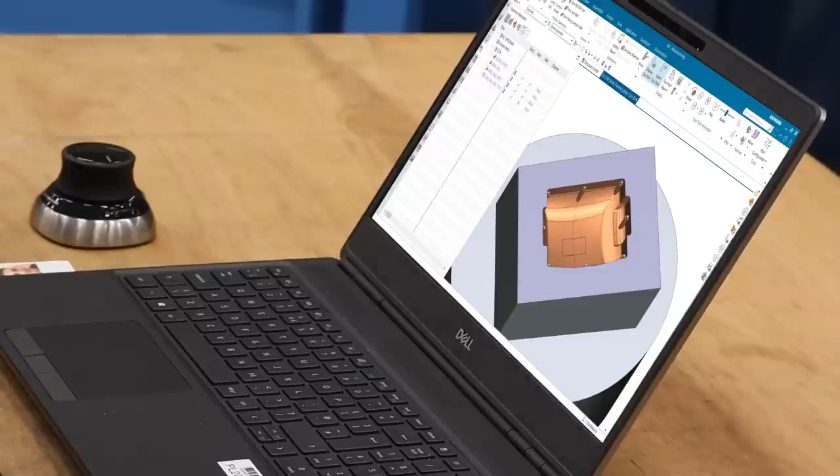I'm now going to head over to the machine shop for the next stage. So here we are on the shop floor with our additively manufactured mould, and we're going to do the final machining of the finished mould here. So we have the finished component here in NX, and we also have the part as it came off the 3D printer. And we left extra material on the 3D printed part so that we could finish machine those faces to ensure a high surface quality for the injection moulding.

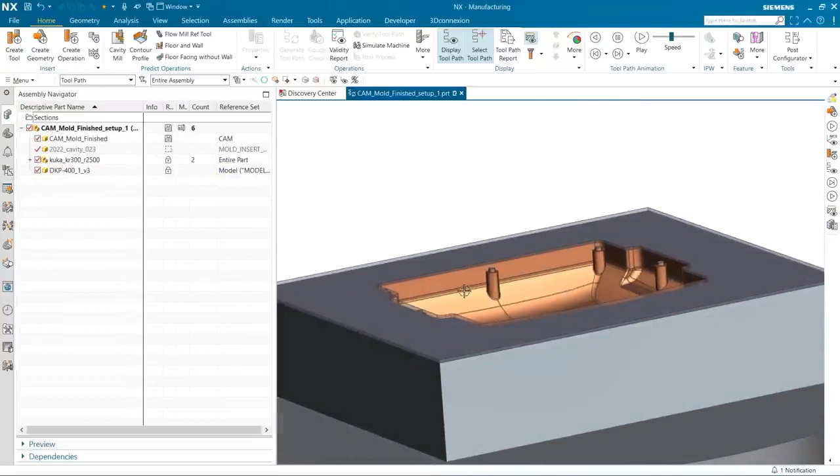It's really simple in NX to be able to create machining operations to finish machine this component, and that's what I'll take you through now. So here we can see both components overlaid, and you can see the extra material between the finished component and the part as it came off from the additive manufacture process. And you can see it set up here in the machine tool station. The first operation is quite a simple one.

We simply want to remove that extra level of material using a floor facing operation, and I can quickly replay that for you now so you can see the material being removed. Once that material has been removed, we can start working on the surface machining operations. The next set of operations are for the injection moulded surfaces, so they need to be of a higher quality and of a higher surface finish.

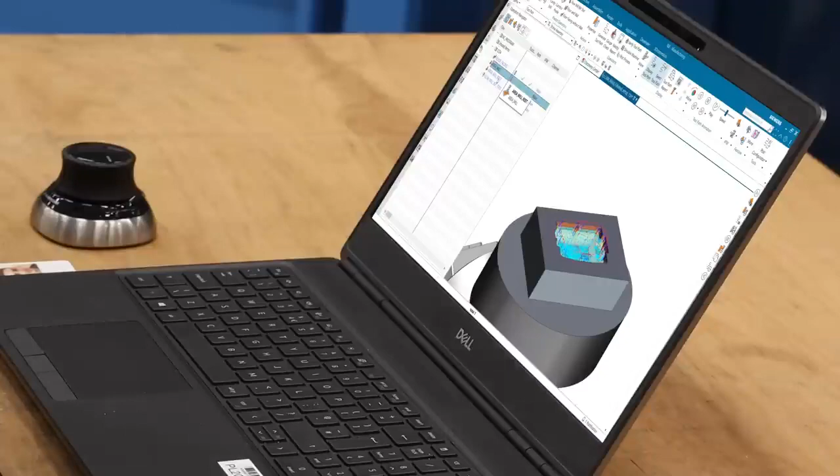For that, I've created an area mill, and because it's quite complex and quite a large surface area, I'm using a larger ball tool to remove the bulk of the material as quickly as possible. We've still got a lot of material to remove because of the size of the radius against the surfaces in the mould. So in NX CAM, it's really easy to copy and paste that operation, simply drag it under a smaller tool and ask the operation to only remove the material that's left from the previous operation, the rest material. And that's what I've done here.

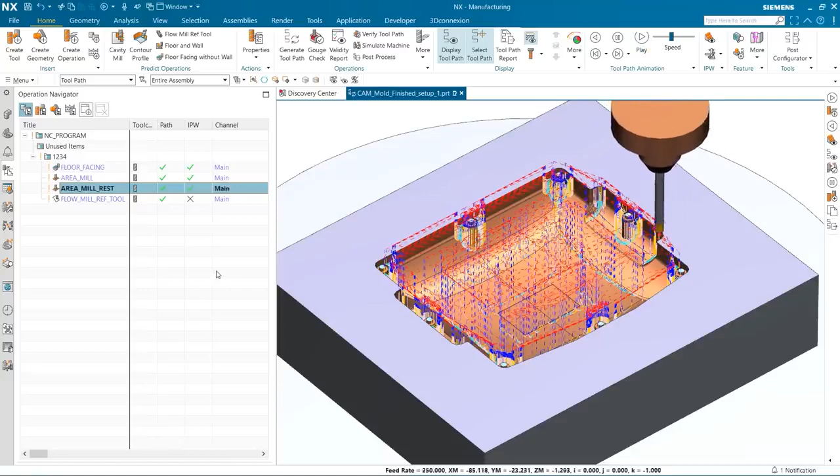When I click play on the operation, we can see the machine tool moving around with the ball nose, removing those last few bits of material. Unfortunately, because of the complexity of this mould, there's still some small corners of material that need to be removed. For those areas, I'm going to use the new flow mill operation. The new flow milling operation is perfect for removing these areas of material, creating high quality smooth tool paths.

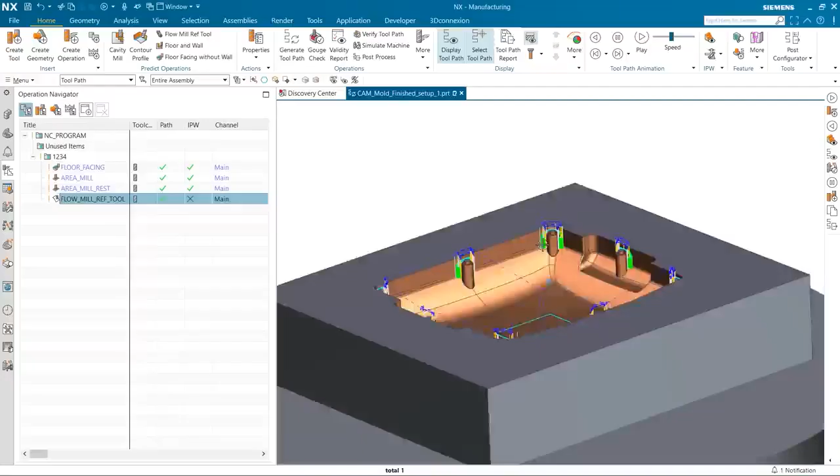But the biggest problem here is we need to use an even smaller tool, and a smaller tool can only stick out so far. So what you can see here is the tool cannot go all the way down. It can't finish the very bottom areas of the mould, and that's because there will be a collision between the tool and the holder. And that's where the intelligence of NX has trimmed the tool path. So we've got a completely safe tool path, but unfortunately we haven't been able to complete the machining operation.

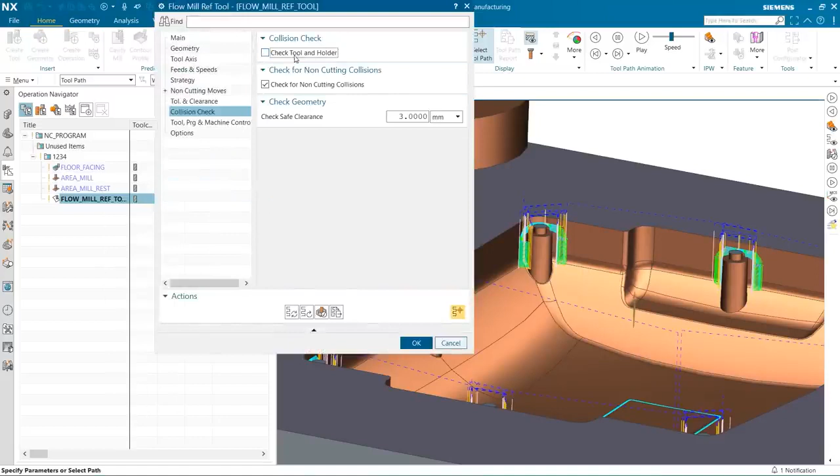But that's not a problem. I'll show you a really clever trick in NX. What we do is simply turn off the collision checking. As a user, I can make that decision to turn off the collision checking, and that's going to give us a full smooth tool path. But as you can see here, we now have a collision between the tool and the tool holder. But that's where the really clever stuff comes in.

With a couple of clicks, I can go to the tool path and activate what's called tilt tool axis. What NX is going to do now is look at all the areas of collision between the tool, the holder, and the component we want to machine, and it's going to tilt that ball nose away. So we're taking a high quality surface machining operation that was traditionally for a 3-axis setup, and now make it fully 5-axis simultaneous. Once that's generated, we'll be able to verify the toolpath using our integrated NC-driven simulation and see the actual robot moving around, creating this full 5-axis toolpath.

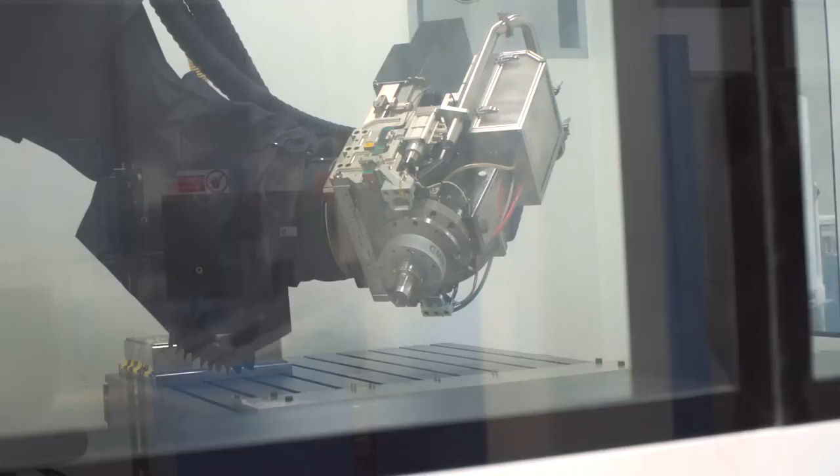So here we can see we've got a completely collision-free, fully 5-axis toolpath. And if I just zoom out slightly for the toolpath replay, here we can see the robot driving the tool around the mould. So now the mould's finished, we can get the housing injection moulded and sent back to the customer.

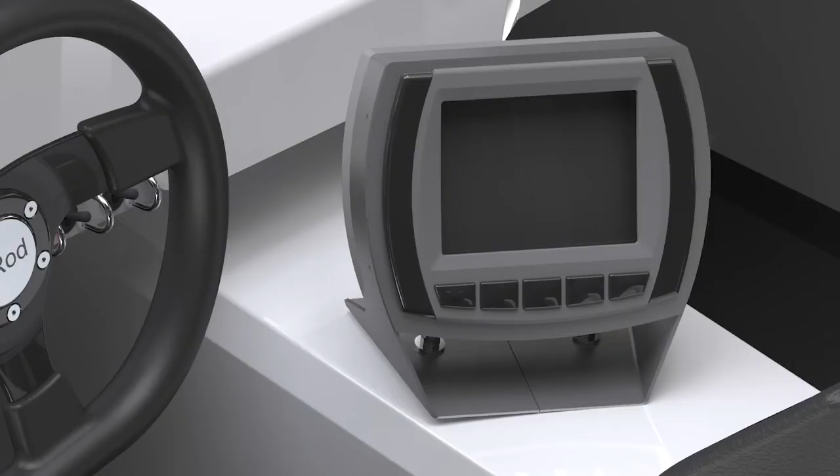Thanks, Joe. So we're back at the design office and we've received the redesigned infotainment housing. We've also received the all-new upgraded PCB back from our supplier. And as you can see, the team has assembled the complete redesigned infotainment system back onto the vehicle. So we've covered a lot of ground today. We showcased the power of NX's integrated environment for electromechanical design. You also saw how OEMs and suppliers can collaborate seamlessly across the mould design, procurement and manufacturing process.